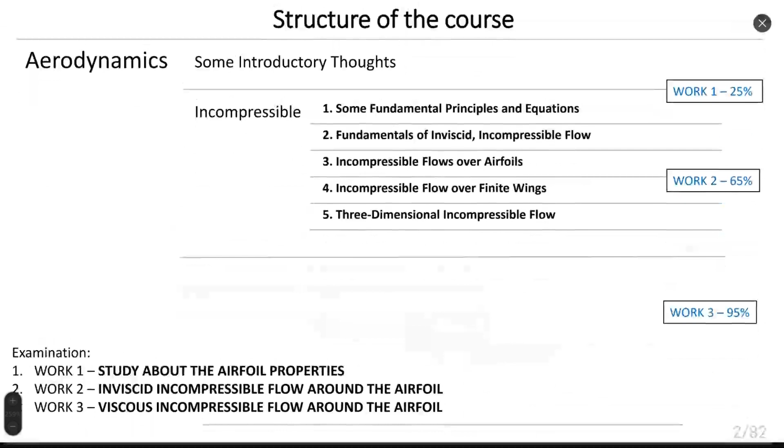The structure of the course is based on incompressible flow for aerodynamics, and for gas dynamics it's compressible flow theory. First, we study some introductory thoughts. It's the first chapter of aerodynamics in the book, and it's the biggest chapter we have, so we will spend most of the time studying this part.

Then we will talk about fundamental principles and equations, things related to building mathematical models for incompressible flows, and fundamentals of inviscid incompressible flow, where we elaborate the Laplace equation models and try to solve simple cases of these flows.

Incompressible flows over airfoils, where we discuss theory of thin airfoils and cambered airfoils, trying to apply Laplace's equation for real airfoil structures. Then we talk about flow over finite wings, where we introduce the question of three-dimensional flow around the wing with side effects.

And at the end of the course, we will talk about the three-dimensional incompressible flow model and introduction to numerical techniques based on solution of Laplace's equation.

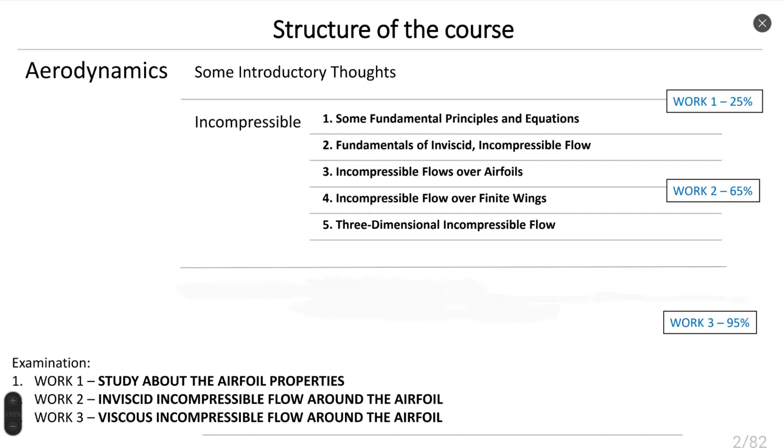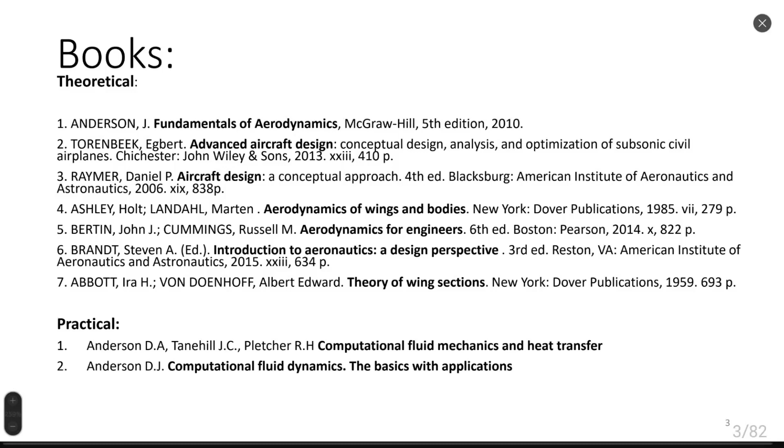Aerodynamics already has more than 100 years of history, and it studies the magical forces which appear on airplanes and allow them to fly, or allow them to resist gravitational forces and take off. These magical forces we will study here in aerodynamics, and our lectures will allow you to understand how to relate force and flow properties happening around the aerodynamic body.

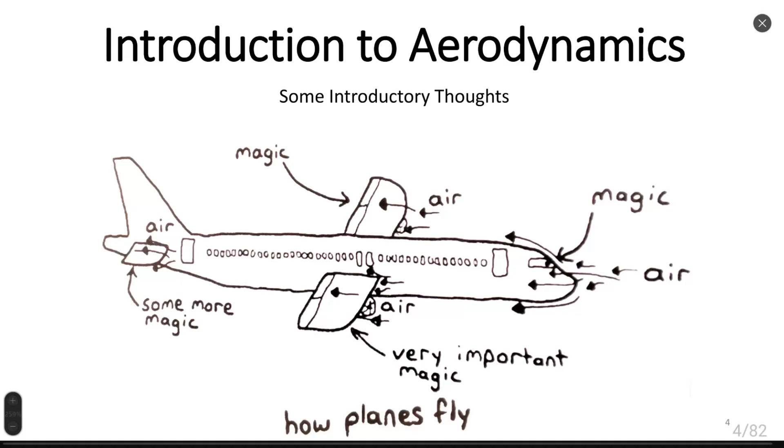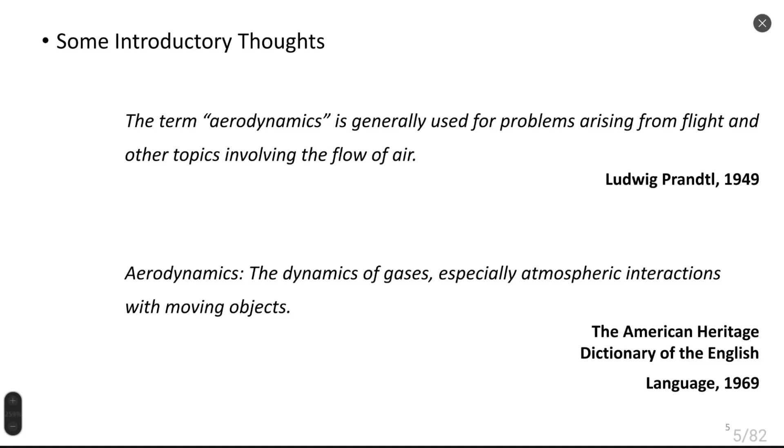History of aerodynamics accounts for more than 100 years of development, and many famous scientists contributed to it. Probably one of the most famous was Ludwig Prandtl, and in this course we will study many of the theories he developed.

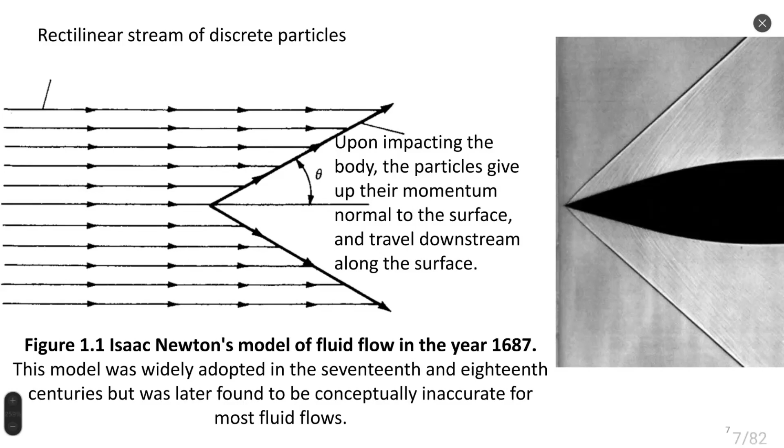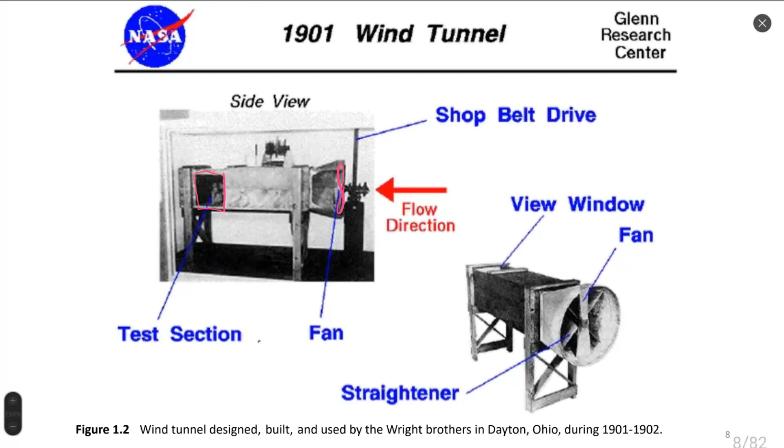One of the very important advancements in aerodynamics and gas dynamics is the development of the theory of shock waves. Shock waves are present in flow that is moving with supersonic velocity with respect to a body. Such interaction of flow and the body creates a rapid change of flow characteristics and properties, which we can consider as a discontinuity, and we call it a shock wave.

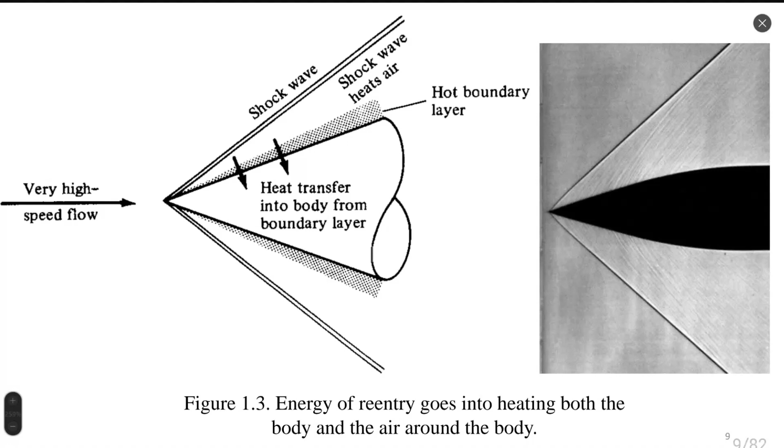Shock waves can be of different types. For example, here on the screen we can see an oblique shock wave, which is inclined with respect to the flow direction. Also in gas dynamics we will meet another type of shock wave, the normal shock wave, and the combination of oblique and normal shock wave in flow around a supersonic blunt body is so-called a bow shock wave. The bow shock wave you can see in my figure 1.4, flow around a blunt re-entry body.

Actually, this is another advancement in aerodynamics, answering the question of what shape the re-entry body should be in order not to burn in the atmosphere. First of all, we understand that a rocket, or the shape of the rocket or re-entry body, could be of different shapes. Depending on this shape, we can have different flow structure around its body, and we will have different properties of heat exchange between the flow and the surface itself.

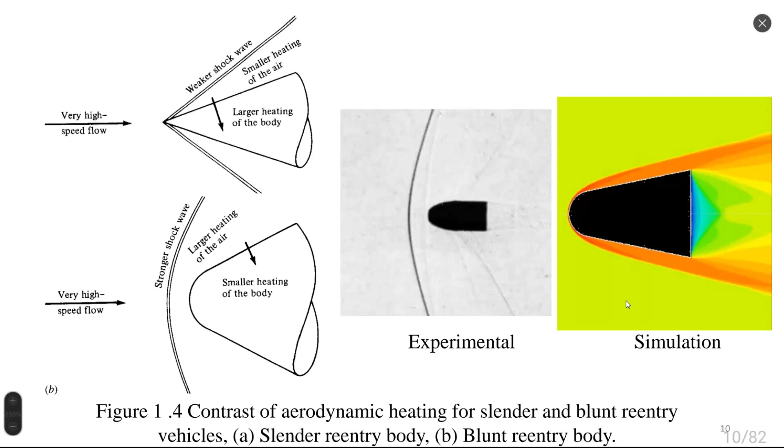In the case of a blunt re-entry body, we will have a different shape of shock wave. As a consequence, we will have larger heating of the air, and a slower velocity of this air. And as a consequence of this low velocity and large heating of the air, we will have smaller heating of the body compared to an oblique shock wave. Such flow structure can be observed experimentally, as you can see in the middle of my screen, and it can also be observed numerically, by numerical simulation or computational fluid dynamics, which we will also study in the future.

Next, we must talk about classification and practical objectives of aerodynamics. When a solid is interacting with a liquid, it is fluid dynamics; when a solid is interacting with air, it is called aerodynamics; and interaction of a solid body with gas in general is called gas dynamics. Also, inside gas dynamics we include compressibility effects, so compressible aerodynamics is usually also called gas dynamics.

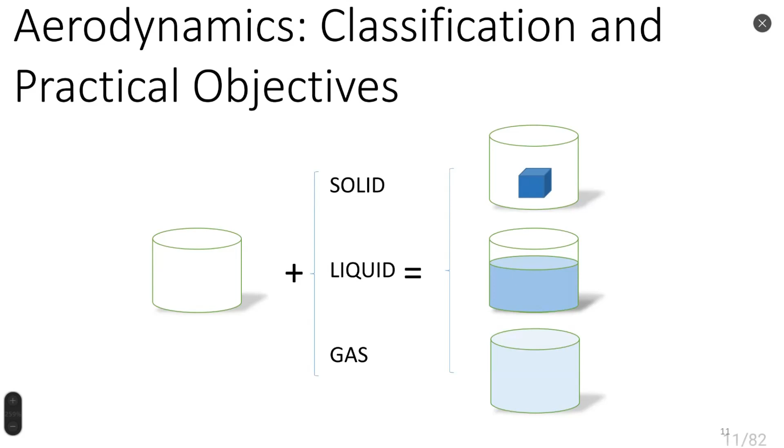Okay, here is the roadmap for chapter 1 of aerodynamics. Here we see definition of basic aerodynamic quantities like pressure, density, temperature, flow velocity, streamlines, and how to quantify and find equations of these quantities. Then we see the source of aerodynamic forces and moments, and how to obtain them by integrating surface properties like pressure and shear stress. Then we will define the general reaction force and its division into lift, drag, axial, normal components, and moment coefficients. Then we will see how to calculate center of pressure on an aerodynamic body.

After doing this, we will find a way to make dimensional analysis, which would help us find relation between, for example, a test of a model of an airplane in an aerodynamic tunnel and real flight conditions. Then we will talk about fluid statics, what happens when there is no flow - it's quite a short topic. At the end, we talk about types of fluid flows: continuum flows, inviscid, viscous flows, incompressible, compressible flows, subsonic, transonic, supersonic, and hypersonic regimes. It's a kind of reminder for people who had worked with fluid mechanics or fluid dynamics some time ago. For people who just finished fluid mechanics and fluid dynamics, these would be very simple topics.

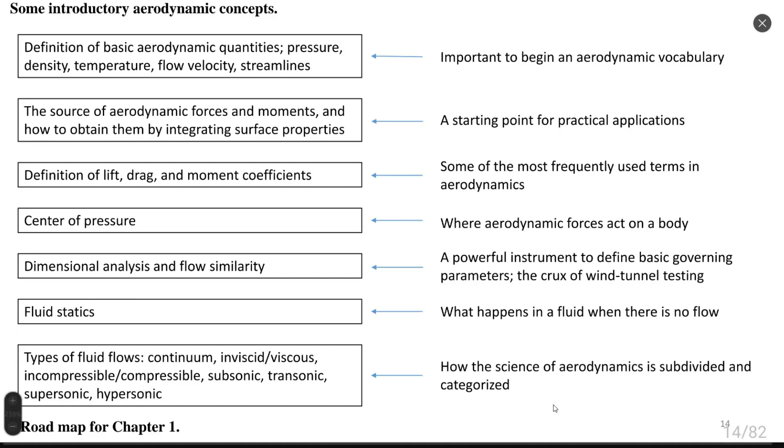Okay, the first part of chapter 1 is fundamental aerodynamic variables. These fundamental aerodynamic variables are scalar or vector values. Maybe one of the most important is pressure, defined as the limit of the ratio of elementary force to elementary area. Pressure can be seen inside the fluid or on the body surface.

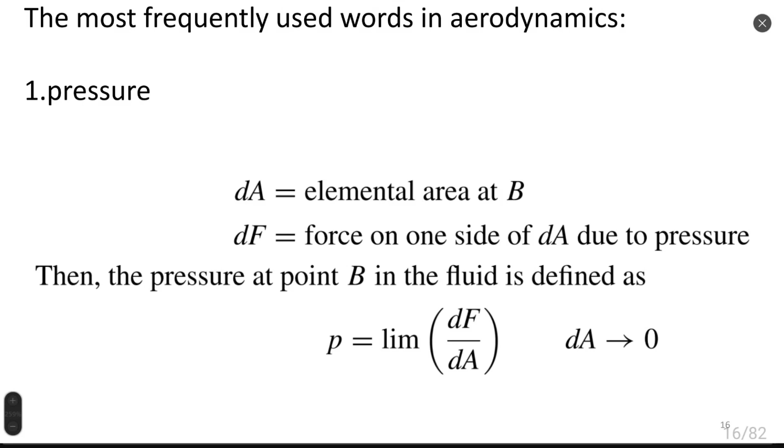Then we have the definition of density, which is the limit of mass differential by volume differential. Density has dimension of kilogram per meter cubed.

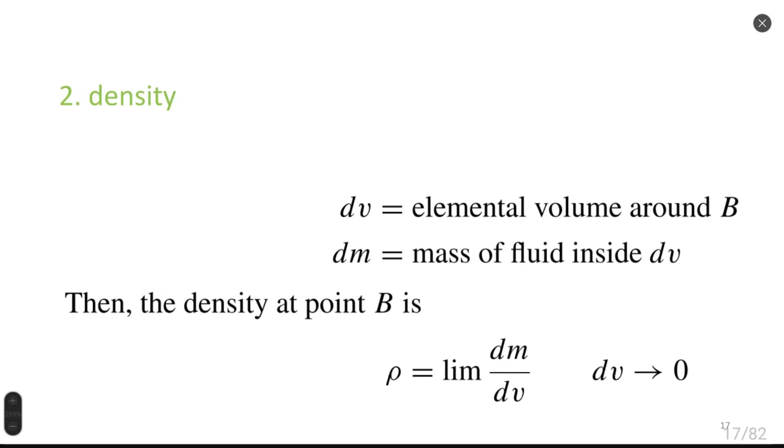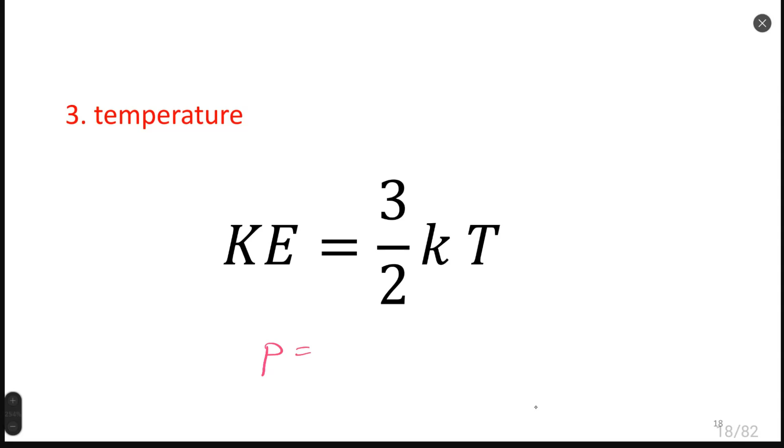And temperature, which can be defined by the kinetic energy of gas through the Boltzmann coefficient. Temperature can also be defined by the equation of state of a gas. There is a relation written as pressure equal to density multiplied by gas constant multiplied by temperature, where temperature could be calculated from this equation. To use this equation, do not forget that we must have all quantities in SI units, for example pressure in Pascal, density in kilogram per meter cubed, gas constant in joule per Kelvin per kilogram, and temperature in Kelvin.

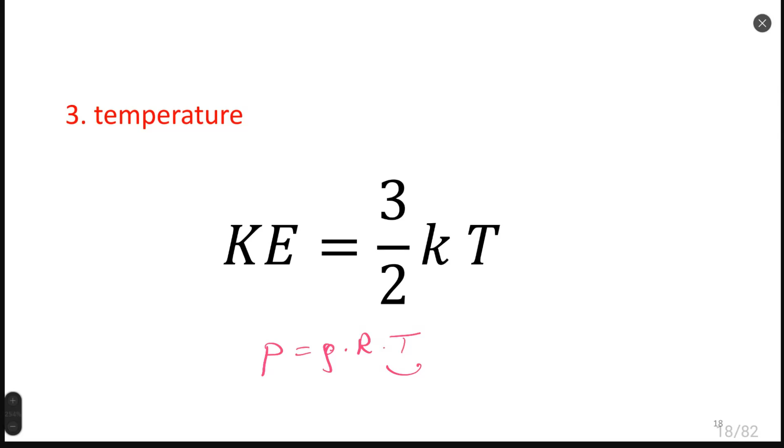As a vector property, we have flow velocity, which shows us the direction of movement of fluid at any point. If you remember fluid mechanics, this fluid velocity could be different for any point in space, as well as any scalar property like pressure, temperature, and density.

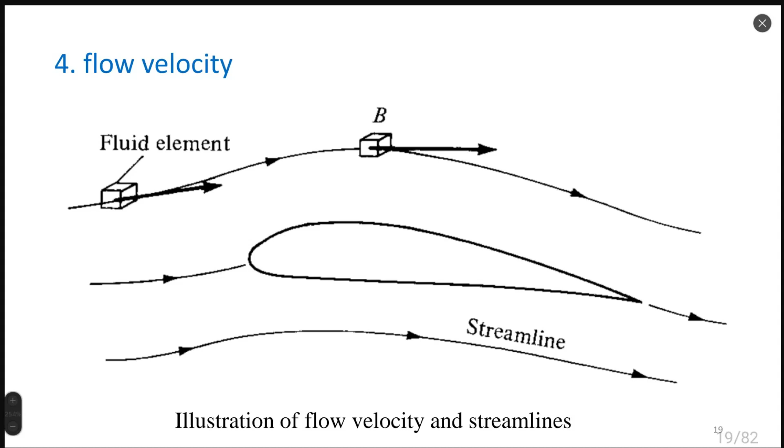Then we have the definition of shear stress, which is related to viscosity. Shear stress is proportional to the dynamic viscosity coefficient multiplied by the gradient of velocity in the direction normal to the wall, where y direction is perpendicular to the wall of the body. Usually shear stress occurs inside the boundary layer, where velocity gradient has a considerably high value. Outside of the boundary layer, where velocity is approximately the same everywhere, shear stress is negligibly small with respect to pressure forces.

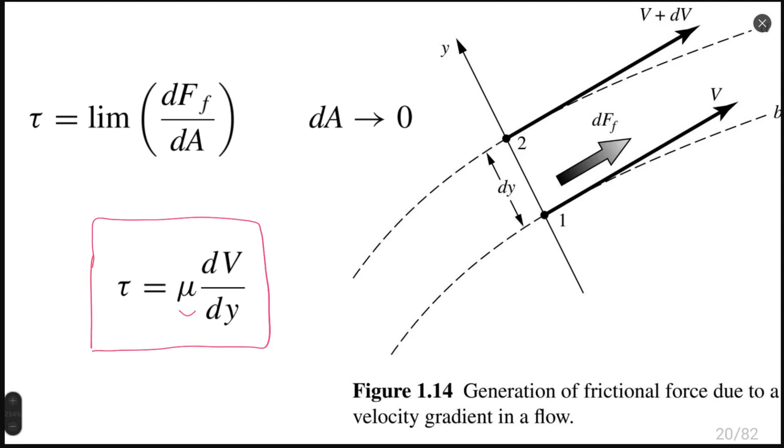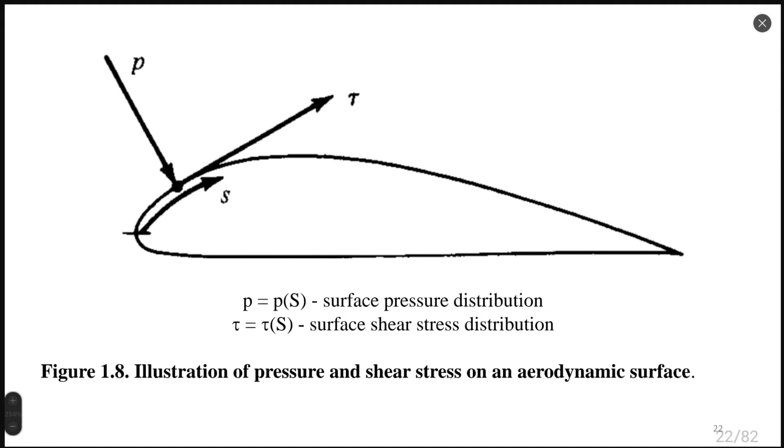Once we talk about thermodynamic and aerodynamic properties, we can speak about aerodynamic forces and moments. What are these forces and moments? The source of aerodynamic forces and moments are pressure and shear stress distributed on the surface of the body. We know that pressure force is always perpendicular to the body surface and shear stress is tangential to the surface. Once we integrate, which we will see very soon, these forces will result in a moment and a reaction force.

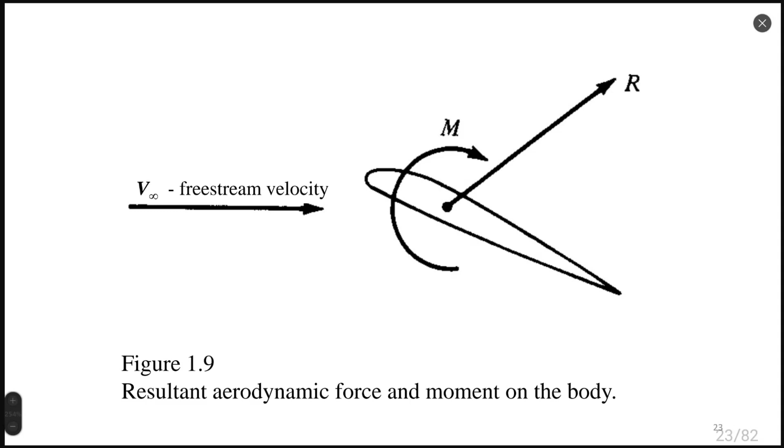After we obtain the reaction force, we can split it into various combinations of forces, which would be probably perpendicular forces. Here you can see on this screen there is a reaction force as a total of all influence of pressure and shear stress on my airfoil, and this reaction force could be split into lift, for example, and drag. Lift is denoted L and drag is denoted D. Lift and drag forces are perpendicular one to another. Lift force is also perpendicular to the infinite velocity. Here you can see it on figure 1.10.

So lift is perpendicular to V infinity, and since lift and drag are perpendicular to one another, drag is parallel to the velocity vector. When we work with aerodynamic quantities, sometimes it's useful to split the reaction force into another pair of vectors, called normal force and axial force. Axial force is the force going parallel to the main chord of the airfoil. The chord is the straight line which joins the starting point of the airfoil, called the leading edge, and the final point of the airfoil, called the trailing edge. Perpendicular to axial force, we have the normal force.

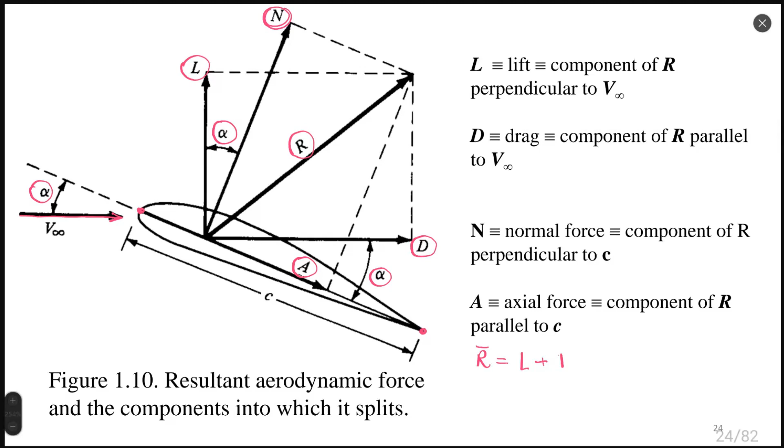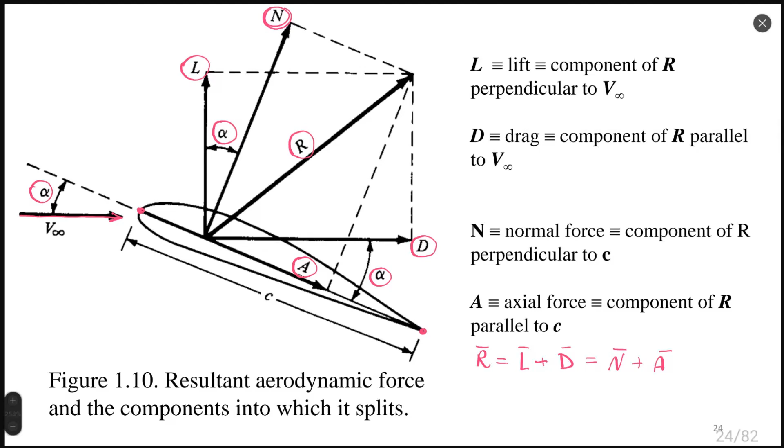We can see that lift force can be calculated by taking the normal force value multiplied by cosine of alpha, minus axial force multiplied by sine of alpha. The drag force can be calculated as normal force multiplied by sine of alpha, plus axial force multiplied by cosine of alpha. This can also be seen or visualized based on our schematic of forces.

Let's see how much lift force we get when we take the normal force and multiply it by cosine of alpha. I will make a projection on the lift force direction. So my N multiplied by cosine of alpha would be this big vector starting at the origin of coordinates and finishing at the top, so it's bigger than my lift force. I need to subtract some value, which you can see on my screen, and this would be exactly the axial force multiplied by sine of alpha.

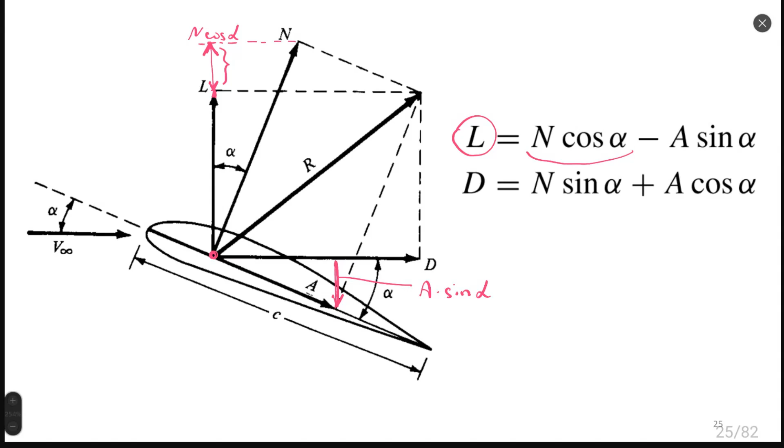Let's make a projection again toward the direction of lift force. Since my axial force is going down, it will generate a projection vector also going down, and this projection vector would be equal to A multiplied by sine of alpha. This is exactly the vector which I needed to subtract from my first vector, N cosine alpha. As a result, I receive the lift force.

And for the drag force, we can do the same. We just need to project normal and axial force onto the direction of the drag force. Let's project the normal force carefully along this projection line, and I'll denote it as N sine of alpha. There is a big part missing, which I'll obtain by projecting the axial force onto drag, shown here in another color for better visualization - this is A cosine of alpha. When I sum N sine alpha and A cosine alpha, I receive my drag force.

This is how the transformation can be done, and such a transformation can also be provided in the reverse direction - from lift and drag forces we can obtain normal and axial force. I hope you can do it by yourself. In one of the videos in the questionnaire of aerodynamics, additional questions asked by students, I already explained this. I hope you can find it by yourself.